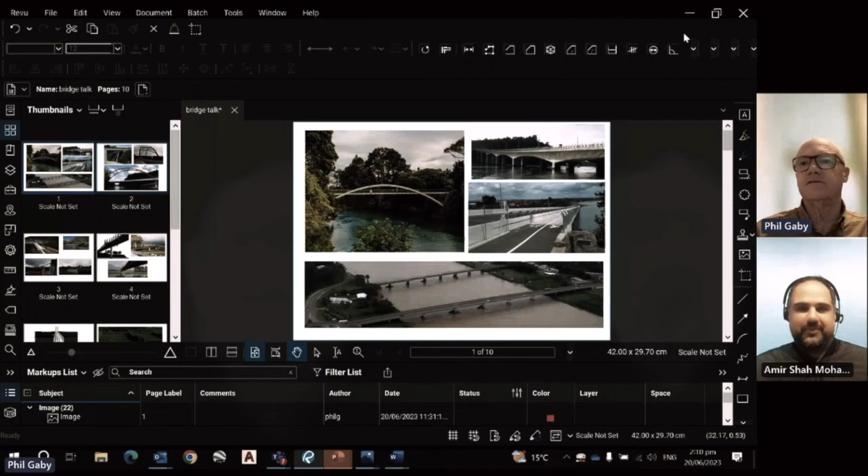Now, can I ask you to share a few examples of steel bridges you have conceived and designed in New Zealand and Australia? And if you have any slides, feel free to share. Well, can I actually start with a couple of bridges that weren't steel bridges and how they actually fit in nicely with the theme, because you can see an evolution of themes here. So here we go. Can you see this? Yes. And let's see if it'll do a presentation. Yeah. There we go. Awesome.

I'll just go back to the beginning. Well, when I was in that buildings firm in Otahuhu, this is my first bridge, which is a pedestrian footbridge made out of timber, and it's fallen apart. Timber does not last in the open air. It is being replaced now with a steel network arch. And Beca are designing it, and funnily enough, I was the peer reviewer of it. So whilst at Beca, we did a few big bridges like the Upper Harbour Crossing in concrete, the concrete box girder bridge.

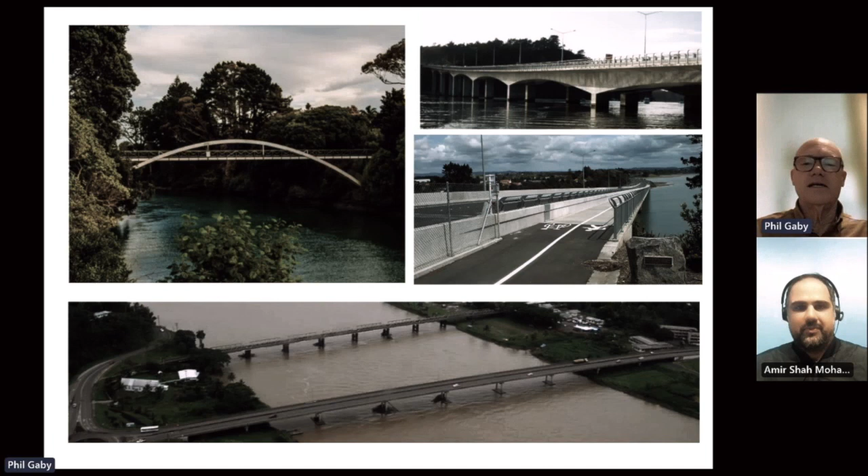And in Fiji, we replaced a rotten steel bridge with an incrementally launched concrete bridge. But moving on,

the first, as I said before, Ray from HERA introduced me to the idea of ladder bridges. So that Matahorua Gorge is one of the original ladder bridges that we designed. I conceived it, but one of our very clever young engineers, Bruce Galloway, designed it.

And to the right there is a network arch. Ray had also organised the great Norwegian chap who invented network arches to come out to New Zealand. So we decided to build one across the Waikato River. And Michael Chan, who now works at Opus or WSP, and Rob Preslin finished the design of that second structure. So I don't know if you've driven over the big arch. You probably have if you've gone to Taupo.

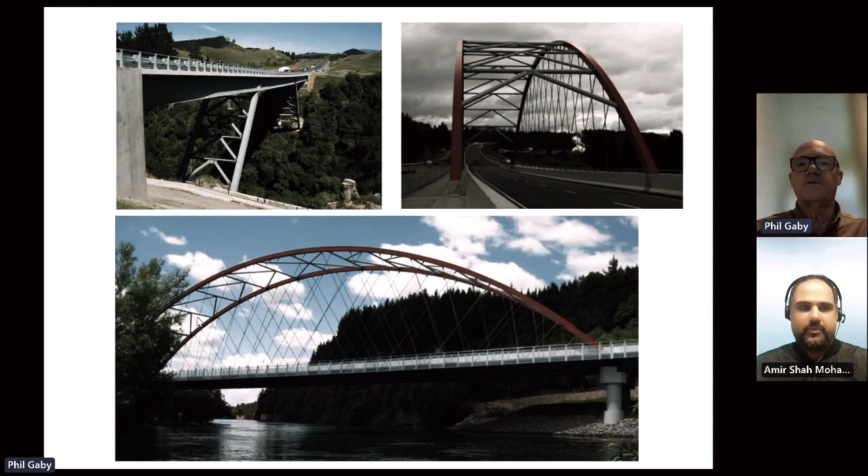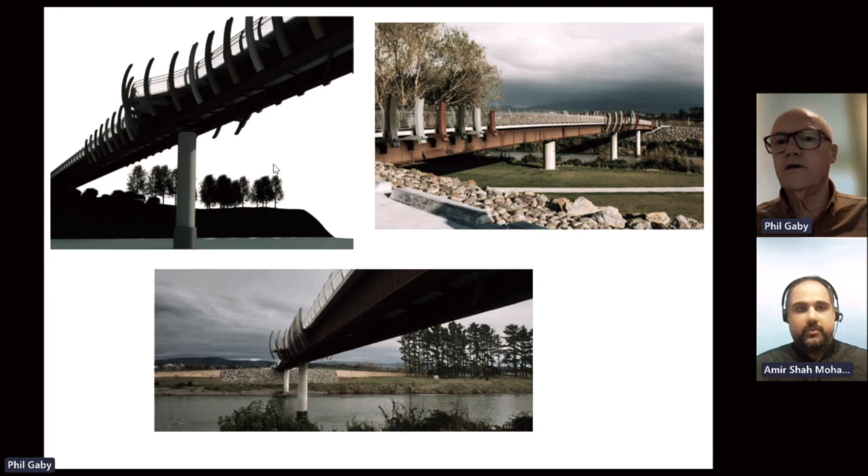But here's a big footbridge in Palmerston North. It started off being a box girder bridge, and I'll explain why you've got to try and avoid box girder bridges unless you absolutely have to use them. And it's not because they're bad, it is because the codes are very conservative for box girder bridges.

That's some of the bridges that we've done. Now, most of these bridges, I'm generally involved at the front end of the job, but we have a whole team of fantastic designers who do the real work. So I would not claim to be the sole designer of any of these, just part of a team.

Amazing. That was really interesting. Thank you so much for sharing these experiences and these examples. My next question is about network arch design. How did the network arch design compare to more traditional solutions in terms of its performance?

Oh, they're fantastic performers. Let's put it in a different way. Say a 100-meter long traditional steel bridge will weigh about 300 tons of steel. A 100-meter network arch will be about 120 to 130 tons of structural steel, to 200, depends on how wide it is. They are so efficient, but they are more complex to fabricate. So there are situations where they are really good, and there are situations where a traditional steel or precast bridge will be cheaper.

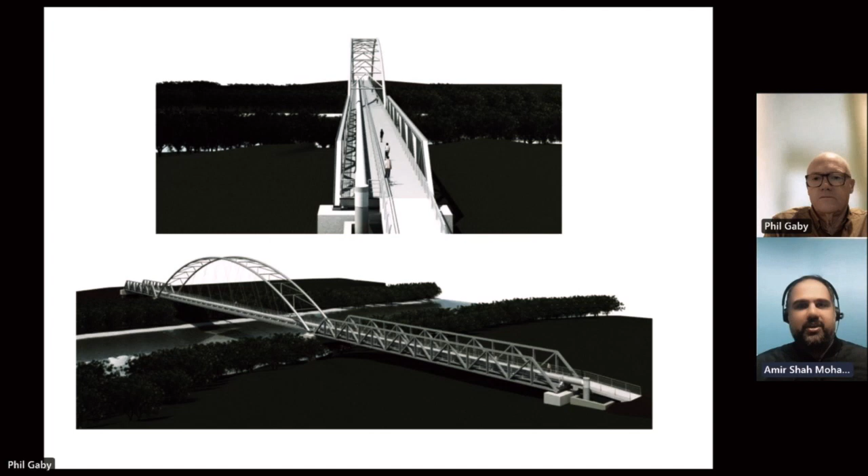Okay, thank you so much. That's really impressive. And I'm curious to know what has been the thinking behind the Perry Bridge, which features sloping arches instead of vertical arches. Yeah, this is Perry Bridge, and this was an idea that I had fermenting for about 10 years, and we finally found a situation where we could use it. And so Tim Brook and I worked on the concept, and then Tim took it through to detailed design. He's one of our engineers.

Now, the leaning arches, for this reason: the bridge is only 3 meters wide and it's 130 meters long in a single span. So if you had vertical arches, the deck would be wobbly. But if you slope the arches, they kind of self-brace the structure. They fall into each other.

So it is much stiffer than a parallel arch system. And that is why, for this bridge, we went to sloped-in arches. And when we did the detailed and sophisticated analysis that we do, we found that it performed really efficiently for this longer span, thin bridge.

Also, the hangers are on different inclines as you go across the bridge, and that also braces everything. If they were vertical, things can swing sideways. If they're on a slope, then if the load goes one way or the other, some hangers tighten, some loosen, but the thing doesn't swing. So, for a very slender bridge, it is not particularly lively, which is great for a cycleway pedestrian bridge. That's really the killer solution.

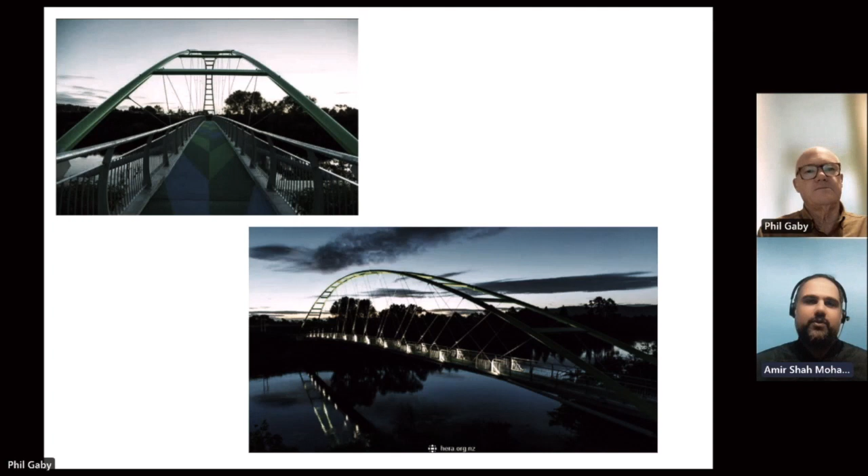I've got a question about the Matahorua Gorge Bridge. Why did you choose a ladder bridge for the deck, and what was the reasoning behind the sloping steel piers? Yeah, the Matahorua Gorge Bridge is a classic location for a steel bridge. It is very difficult access. The river below is 70 meters down from the bridge deck, and from one side of the gully to the other is about 120 meters.

So why a steel ladder bridge? Easy to erect. You do not need big pier caps. You just sit the girders directly on top of the columns. And constructing pier caps in that situation is very awkward.

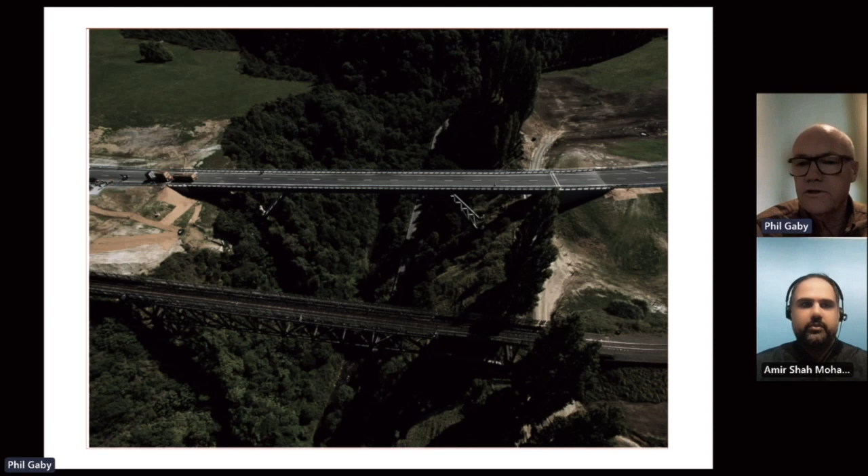Now, why the sloping columns? Well, those columns are only about 25 meters long. And if we had vertical columns, they would be 60 or 70 meters long. They would be unaffordable. Also, the structure cooperates with nature. With sloping piers, you're actually stabilizing rather than destabilizing the slopes. So they made really good sense.

Now, it's a zone of high seismicity as well. So concrete and high seismicity are not a good combination. Steel bridges like this are 60 to 70% of the weight of a traditional concrete bridge. And so that's a whole lot less seismic demand that the substructure has to deal with. So there's a few reasons.

Now, steel ladders, as opposed to multi-girder steel bridges: multi-girder steel bridges need pier caps, whereas a steel ladder does not need a pier cap. It can sit directly on the columns. That saves one of the more complex construction challenges that you get with bridges.

And with a steel ladder, it is in fact a ladder. They have what they call transoms that span between the main girders, which are spaced as far apart as possible. And on top of those transoms, you drop precast units and then pour a topping. Very easy construction, very modular construction.

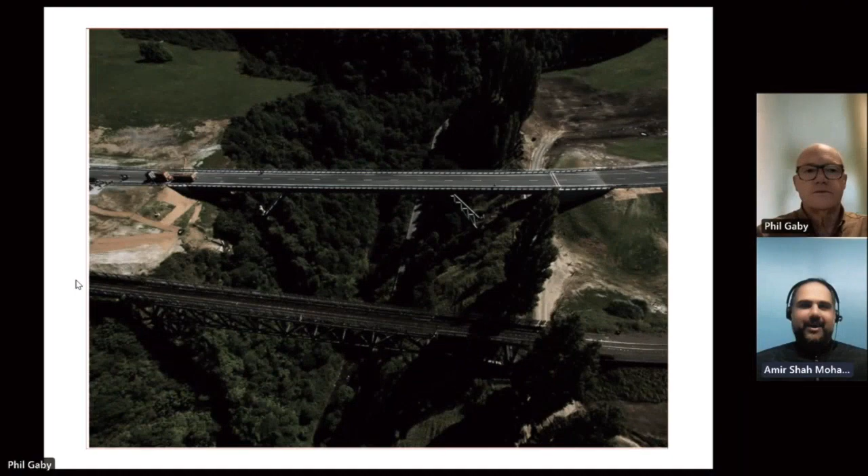Thank you so much. Regarding Bridge 20 on Transmission Gully, why did you choose a steel box structure rather than a concrete one in this particular situation? Oh, look, that's obvious. We should not be using concrete boxes in high seismic zones. They are many times heavier than steel bridges, and the foundations become massive. And so purely the idea of going steel composite rather than, say, a balanced cantilever here was to keep the weight down and therefore make the seismic demands manageable.

Okay. And the other thing about this bridge is it's only about 230 metres long. You need a bridge of about 500 or 600 metres long if you want to go to a concrete box because of all the formwork costs and temporary works and things. So it isn't really long enough for a concrete box type of structure in any case.

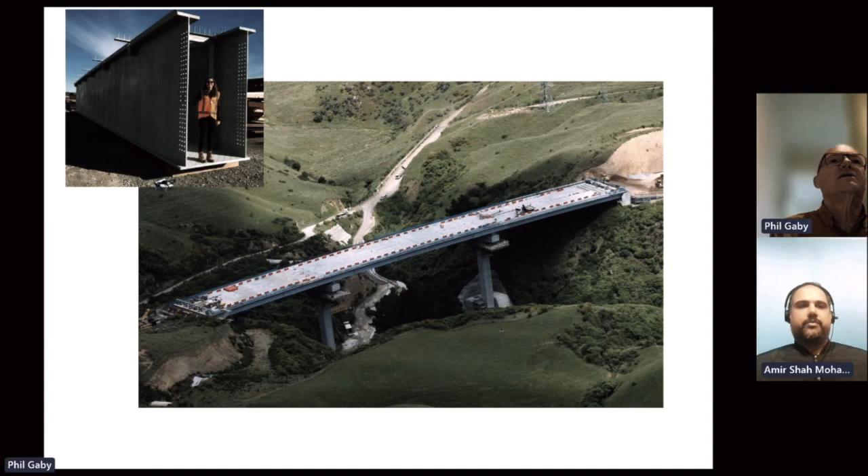And quite often when you're in remote situations, there's weight limits on roads and bridges, which means you're limited with the size of concrete girder you can carry. So remote areas, we do so many bridges in remote areas for local councils and farmers, and we generally find they're steel. The longer spans suit steel, like anything between 60 and 100 metres.

If someone comes up with a concrete bridge, let me come up with a steel bridge and then we'll compare notes. Now, with a bridge, you don't just look at the bridge deck, which is what some people do. You have to look at the substructure with the bridge deck. Quite often a concrete deck will be similar cost to a steel deck or even cheaper. But when you add in the substructure, that's where reality hits.

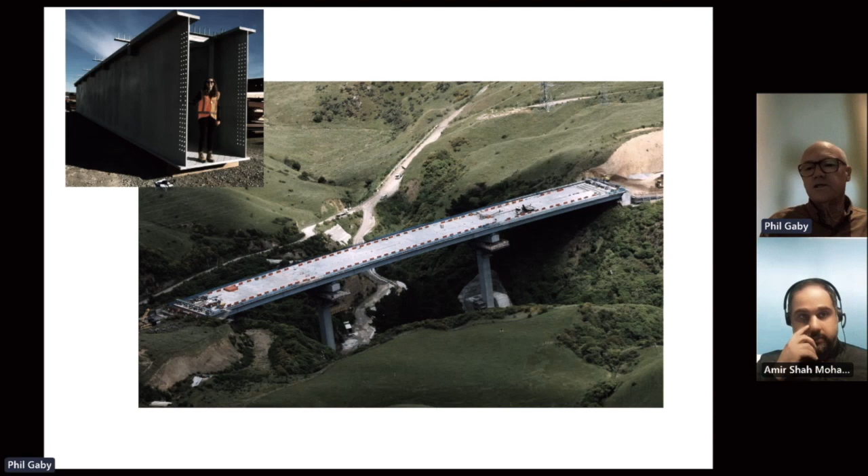So longer span bridges, we're doing single span bridges up to 130 metres in steel, and they're just wasting everything else in terms of cost, much cheaper. Now, the great thing about steel is you can reuse it. We regularly put refurbished steel railway spans back on top of new piers. They're lifted off, taken away, fixed up, and brought back to site. Or they're taken away and used on another job.

So KiwiRail uses this process of reuse all the time. They've got yards of these steel spans that they refurbish and reuse. So off comes a badly damaged span, on goes a new one. They take the badly damaged one away, repair it, and then put it back somewhere else. You cannot do that generally with, say, precast concrete.

And the other really cool thing about steel is you can use modular construction. And Eastbridge, who we work with a lot, regularly build modular bridges in Papua New Guinea and Fiji, all over the South Pacific and in New Zealand. And they're pretty similar. They're set up to punch holes and angles and bolt them together. Very quick to design, very easy to erect in small pieces. You can fit everything into a container and away you go.

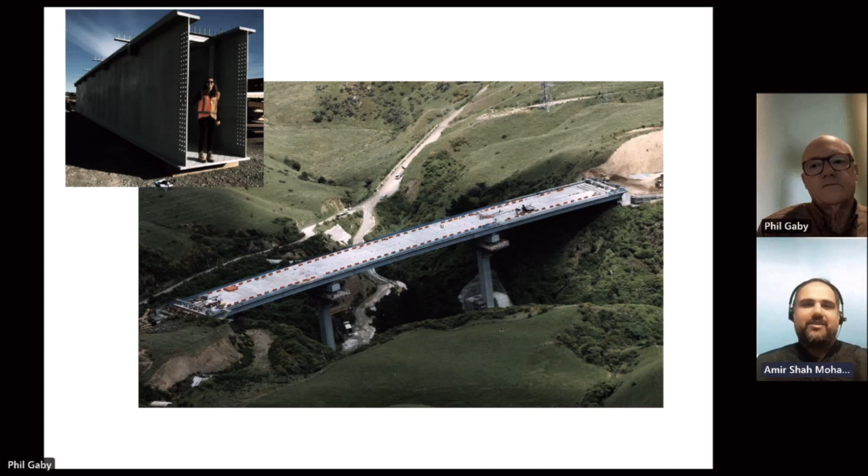Now I'm going to ask a challenging question. If you had the opportunity to make changes to the existing codes or regulations, what modification would you propose to further enhance the economic viability of steel bridges? Look, what changes to the code? Well, I'd move away from AustRoads. That won't be very popular.

Or some clauses in particular. There are some really draconian clauses within the composite design section on how much reinforcement you need in the slabs that go over the top of the beams. It's about 3 or 4 times what was traditionally used at the Ministry of Works time, and it's mandatory. So what we're doing these days is throwing all this reinforcement into the slab of these steel bridges, and that costs a lot of money.

I mean, hundreds of tons of steel, I believe, are wasted a year in the form of reinforcing. Now, reinforcing costs somewhere between $3,000 or $3,500 or even $4,000 a ton to supply and fix. And if you have 100 tons of structural steel and you've got 50 tons of reinforcing steel because of the requirements of AS 5100, you'd have to ask yourself, does this make sense?

Now, I don't think it does, because I have looked at literally tens, if not hundreds, of steel bridges in New Zealand and in the UK, where I worked in assessment, which have almost no reinforcement in them and have done just fine. So there's one thing we could do. We could look critically at some of the clauses in the bridge manual, which refers us to Austroads, and see whether they are really relevant, and don't get frightened to actually say, nah, that doesn't make sense in the context of New Zealand. So that's one.

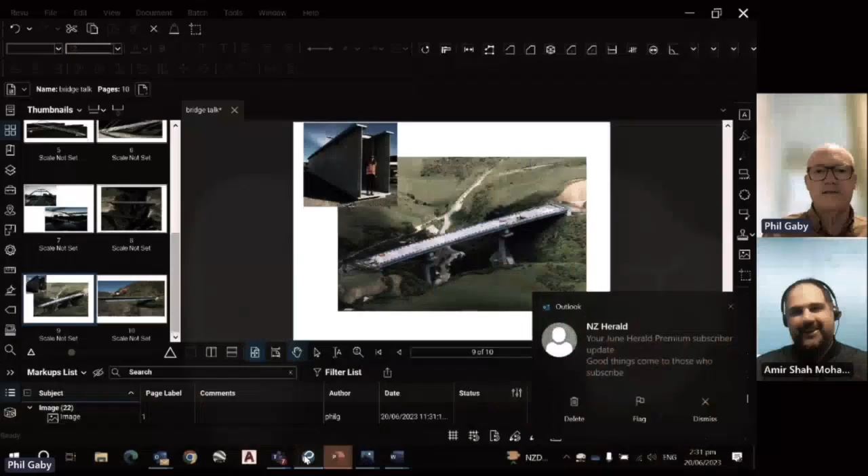Personal question. Among your various steel bridge designs, which one holds a special place in your heart and why? You would be surprised. I'll just get it up, and here we are. This one. It's a little bridge. It's a 40-metre single span bridge located out at Baring Head in Wellington. It's a very remote location. Why do I like it? Well, it's materials efficient. Why is it materials efficient? It works with nature and doesn't fight against it.

How could that be? Well, the conforming design that we competed against had normal standalone abutments that acted like retaining walls. And the abutments had about 8 piles each to hold them up because of the seismicity in the region. So we just said, well, why don't we let one riverbank hold the other one up? So we made a fully integral, fully framed up steel structure. And we went from 8 piles to 3 on each abutment. We also got rid of 70% of the abutment concrete because of this much more efficient system. And what's more, because it's completely framed up, a fully integral steel bridge, it is a whole lot less lively than a non-integral bridge.

The framing and the interaction with the soil dampens the vibration on integral bridges by a factor of about 5 in some cases. Also, by framing it up, we reduced the bending moment at midspan, and we greatly reduced the weight of structural steel in the bridge. So, working with nature led to a materials-efficient design. And actually, it looks pretty good. Nice, slender ribbon bridge. And it was quick and easy to build. The whole thing was designed around constructability. And you guessed it, it was about 30% cheaper than the conforming solution because, again, it was materials efficient, it worked with nature rather than fought against it, and it was quick and easy to build.

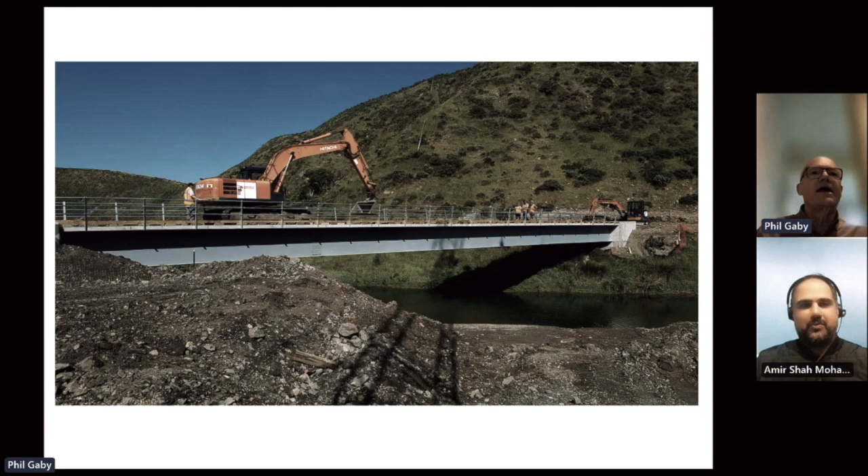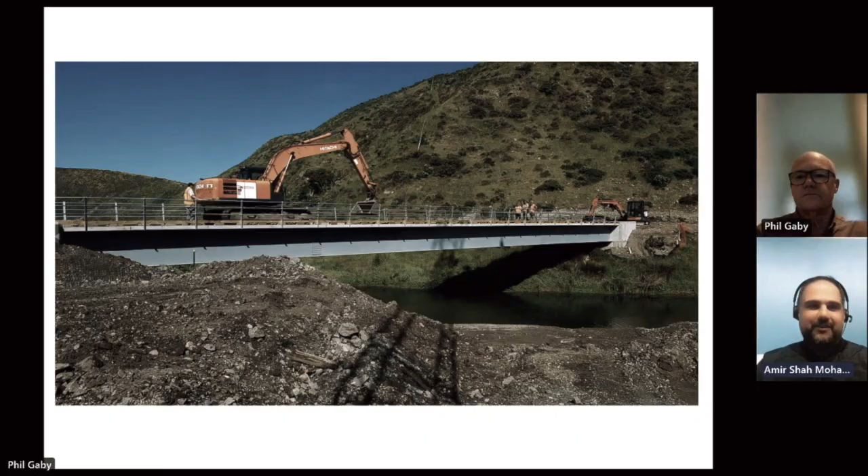So I love this bridge, and we do these sort of bridges all the time, all over the country. Regularly, we end up getting rid of super T or hollow core bridges in remote areas and doing this sort of structure, which is really good because in those remote areas, people can't afford gold-plated solutions. And of course, lightweight means great performance in high seismic regions, and we have lots of those in New Zealand. Awesome, yeah. It was like a metaphoric answer for me. I was expecting that you're showing one of your massive iconic bridges, but we can see that there are a lot of big stories behind smaller projects. So it was really interesting.

Yeah, well, with the smaller projects, there's a lot more smaller bridges being built. And I am shocked at some of the designs I see. They are so chunky. They do not need to be. And I'd love to think that we would start to be a little bit more environmentally friendly by cutting material volumes down. And at the same time, having things that are easier to build and look elegant and all those other wonderful things, and they're affordable, of course. Yeah. Amazing. Big lesson for me.

Thank you for sharing your insights. So let's go to the last question. Can I ask what message do you have for the bridge industry to take on today?

Yeah. I would say learn to manage your fear. Many designers get the number from the analysis and add 20%. But go away and work out how many trucks you need to put on a bridge to reach its ultimate limit state capacity. You might remember the Mangamahu Bridge that we talked about earlier, the network arch, or did we not talk about that? I don't think we did. We didn't talk much about it.